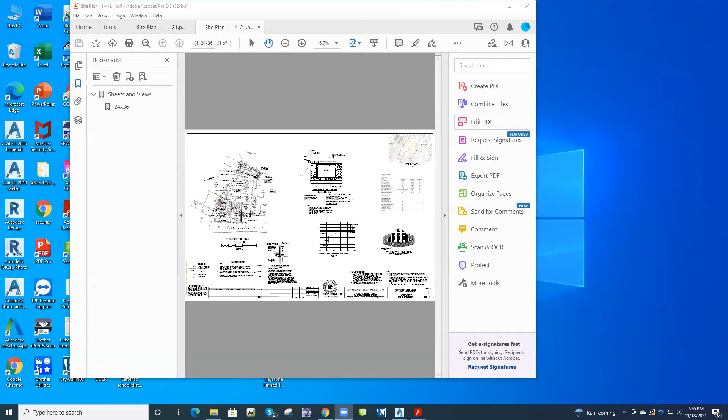So this is the site plan. The wall's back here. Now the wall I was referring to that was removed, it was along this rear property line.

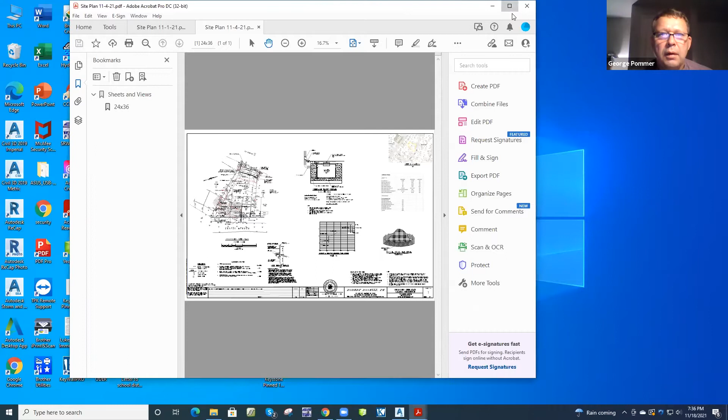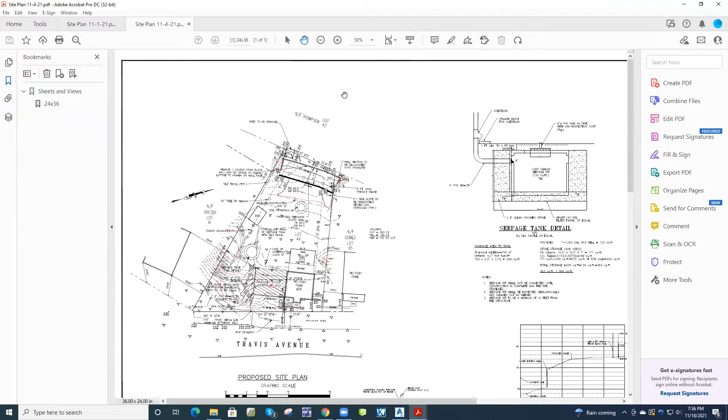That's no longer there. All right, before you go on, can you enlarge this a little bit so we can see this a little bit better? Is that good? Hit the plus sign at the top of the page. Yeah, that'll make it - to your left, next to the hand. Go up, center, go up. No, go up to the right. Keep going. To the right, next to the hand, you see the hand? Yeah, plus, there you go. And then you can move it around by putting the hand over it, exactly. You can zoom in more if you like. Sure.

Okay, much better. Thank you. Okay, this is the wall that was removed, this one back here. The shed will be removed, it's mostly on Mr. Calabro's property. That's still going to come down. This is the existing wall that's going to be lowered.

Okay, and this is the new wall. And then there's some grading along here to basically flatten out the yard back here. And then moving forward, here's the proposed garage, the driveway off the road. Some grading, so we'll use the side of the garage to serve as a retaining wall. It'll be doing double duty as a retaining wall as well. And there's some grading here. And that's about it, I mean, we got a seepage pit out here.

Proposed seepage pit. And that's about it, I mean, that's the crux of what we're proposing.

Okay, so the shed in the back, at the last meeting I guess there was an issue with who's going to issue the notice to remove the shed. Is that still an issue? And maybe Brian can answer that.

Brian Calabro? Yes, Brian Calabro, yeah. I believe maybe Peter Cook and his father, Brian, told the owners, my neighbors, that the shed needed to be removed. And they responded with, 'We're not moving it.' I think that's where they left off.

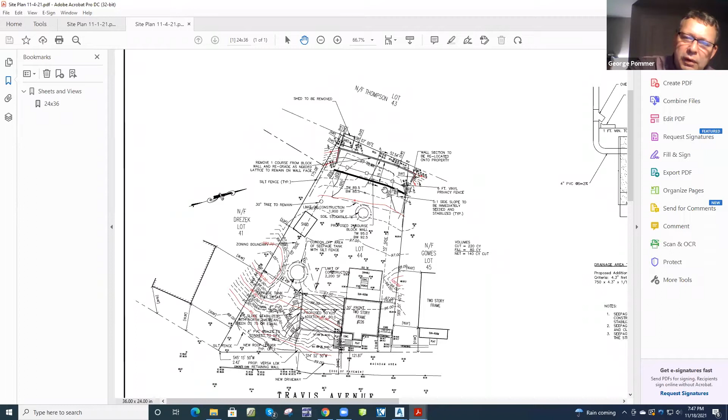Okay. And now the wall that's going further up, you're gonna relocate that? Are you gonna put plantings between the lower wall and the upper wall? Because on the cross section, I didn't see any plantings in there.

Well, yeah, there's intended to be, you know, probably either arborvitaes, or whatever I can safely grow there that'll last.

And Brian, correct me if I'm wrong, the code is 15 feet for two 4-foot tiered walls. That's correct, right? So it's 10? Is it 10 or is it 15? I think you might be right, I think it might be 10. So you went an extra 5 feet—is that what you did, Brian?

Yeah, well, I'll jump in. I just did it to be on the safe side, moved it back an extra few feet. Okay, all right.

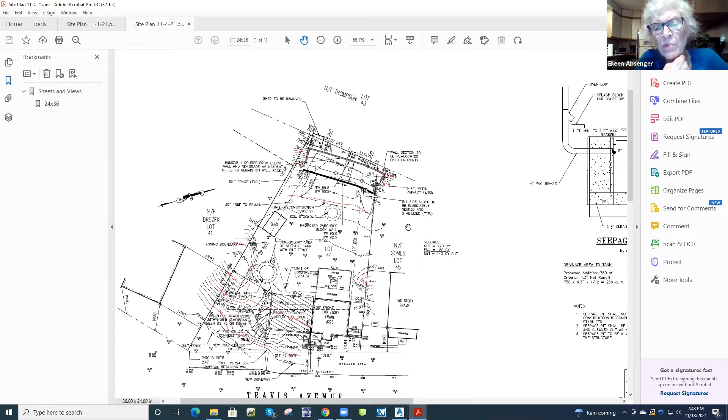Is there enough soil between the front wall and the back wall for the plantings of those trees, Brian? If this is bedrock, that's a lot of soil. Yeah, there's gonna be over 10 feet there—plenty of room to grow trees.

And I noticed you put the fence—what kind of fence is that going up on top? It says vinyl privacy fence. Do we have a cut of that too, or is that just a standard white plain vinyl fence? Standard white, there's no slats in between, just—

It's a panel, Brian. Sorry, section. It's a section panel, correct. Okay.

Well, that will hide—the reason I mentioned that is it'll hide the wall behind it, so effectively you only see one wall from the Thompson property.

More or less. Technically, visibly, you won't see any of the Mafia block at all. All of it's gonna be covered, one way or another, with lattice and ivy.

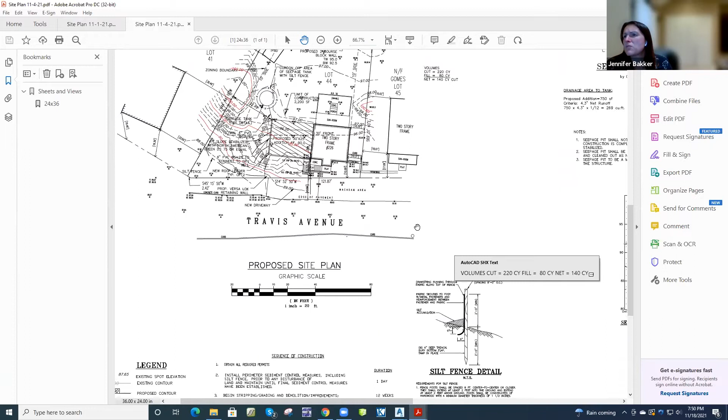Rob, can you scroll down? Scroll down a little bit. I think you have a section, right? Like this? Keep going, and go to the right. Don't you have a section of... there you go.

So that's those two walls in section. I think, Eileen, you were looking kind of for that detail, right? Yeah, I don't want to see Brian put trees in there and all of a sudden they're looking at dead trees and Brian's got to replace them, that's all.

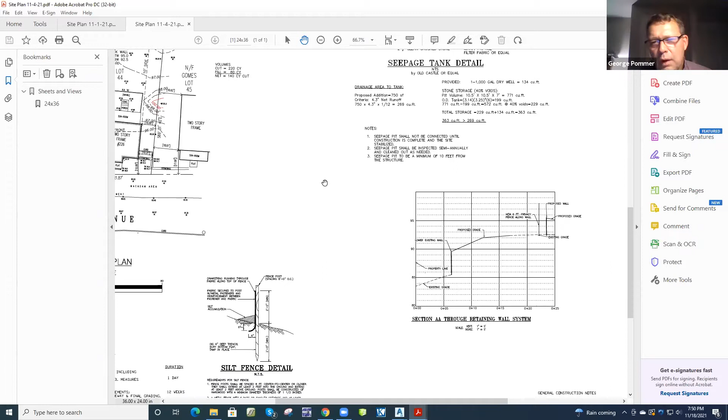So, Brian, the trees would be located right between the fence and the break in the slope? Is that the idea? Yeah, that would probably be best, I would think. I'm not an arborist, but yeah, put the trees on the flatter slope.

So the flatter section. So what is the slope between the top of the wall and where the break is? What is that grade? And the reason I mentioned that is we can't create steep slopes either.

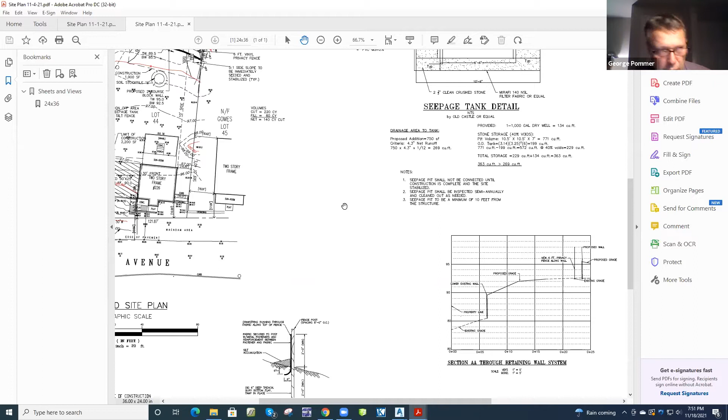It's got to be less than 15%, I think it's just around 15%. If I'm looking at the scale, it's about 2.5 feet over 15, so it's probably right on the edge. Being on the edge is okay, being over is not so good. It's 2 on 12, so it's probably right around 15% slope. Okay.

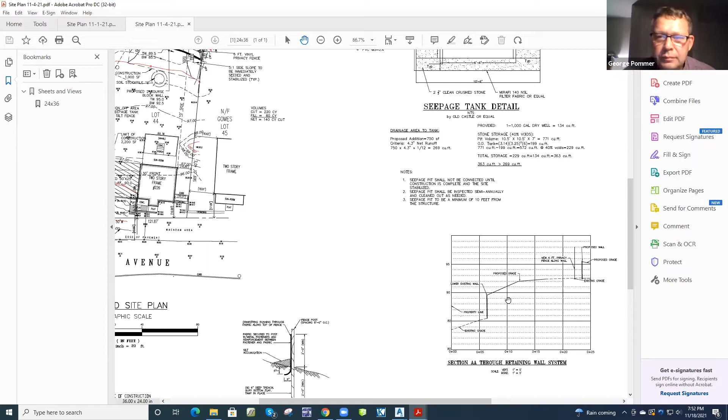All right, so that's the back of the yard. I don't have any further comments on the back. So with regard to the front, if you could blow it up a little bit.

It says on the bottom, right above the T in Travis, you go up, it says proposed Versa Lok retaining wall. Where's that retaining wall? Oh, you know what, that was in there. I should have taken that out, that's a mistake. That wall's not there anymore. I took that out.

Okay, and is that meant to be a driveway? In the addition, is there a garage under the driveway? Yeah, we were asking for architectural sections too, we didn't seem to see them. Yeah, I sent those in, a copy of the architectural plans in my submission. I'm 99% certain of that. I can check my records real quick.

Rob, if you can show that, because the planning board is the ARB as well, please show that to the planning board, make sure they're okay with that. The garage is planning on being street level, just above street level, 2-car garage with a bonus room above it. You have an 89 in the street and a 90 for the addition, so about a foot pitch out, thereabouts.

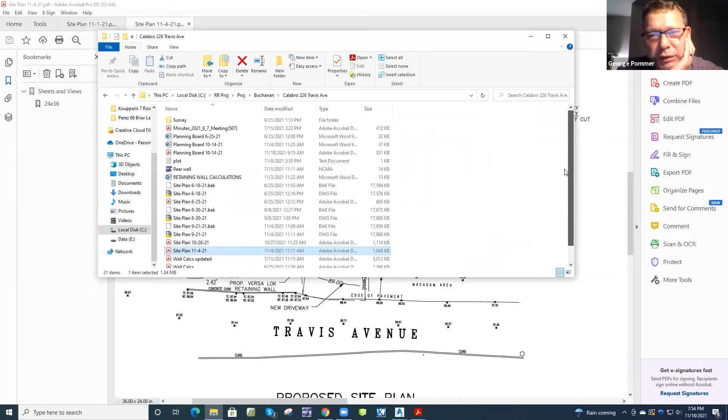But the problem is if you park a car in front of the garage, it's overhanging into the right of way, if I'm not mistaken. What's the distance between the front of the building and the property line? I think that's like 12 feet. Yeah, that's not the length of a car. Right.

Technically, so right now all the cars that are from my house and the neighbor next to me, we're all parking in front of the house down that road. So technically every car on that road from my house, my neighbor's house is parking in the right of way. But you're talking about the right of way being 15 feet.

Yeah, the reason I mention that is the curb, if we put a curb down this street, it's gonna cut your driveway down. That's the problem. If you were to move the curb, it would be fine, but there's a curb there already. The curb looks like it stops right where the hand is, and then it's just edge of pavement. So if we were to continue the curb down the street, we'd be cutting off part of your driveway.

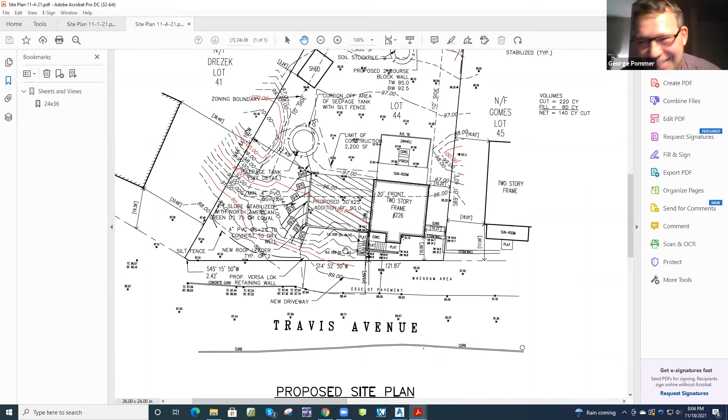And I think that's probably because Brian switched engineers. You went from, I forget the other guy's name. Right. Yes, we switched. But you should do that here as well.

And if you're 30 and above, that's somewhat of the problem we had in the back. Is that for, are you referring to disturbing it, or are you referring to having it when it's all completed? I'm sorry, can you repeat that? Disturbing a steep slope, or are you referring to when it's completed, what's there once the addition was finished? So both.

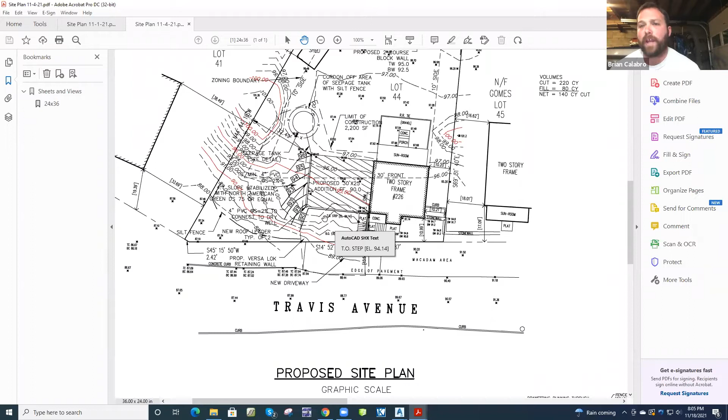So what you disturb in those ranges is one consideration. And then when you put something back, you can't create steep slopes. Correct. So I guess really, once I'm done digging the foundation and the building is completed, either there is no slope, or if there is a steep slope, we need to have put a retaining wall in.

So that's one solution. Let's just go from the 15 to the 30, because that's the range you can work in. And if you started out with, let's say, a 15 and you ended up with a 15, that would be okay. If you started with a 15 and ended up with a 25, you didn't really create a steep slope, but you made a steep slope steeper, in which case you look at it and make sure it's not going to be compromised.

That kind of condition. So if you need a wall to make it not compromised, or a road or whatever, then that's what you got to do. But if the side of the building and behind it can be graded properly to not have a steep slope, that's fine.

So let's talk about the side of the building here. Let's say it was previously 20% steep, and you graded around it and it was 21%. That's pretty much the same thing. You didn't make anything better, you didn't make anything worse. Okay.

So if that gives you any kind of guidance, it's kind of a tricky thing in the code. The intent is to not create an erosion problem. You don't want to make things more steep, but sometimes over 30% would be a problem. Right.

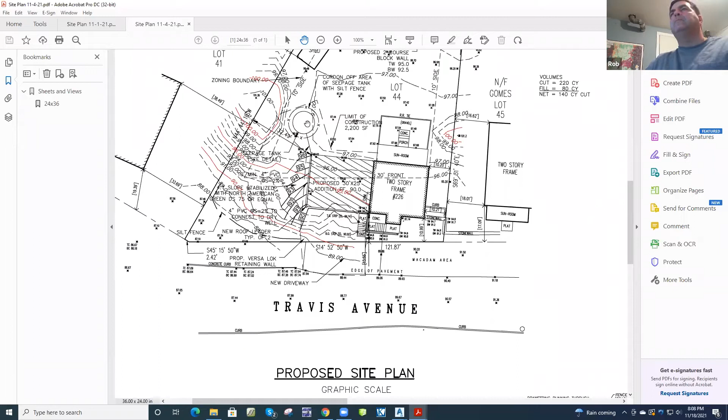And then the drainage from the new addition goes back to the dry well. How deep is that dry well? 6 feet is the dry well itself. It's a 1,000 gallon pit, so it's 6 feet high plus a foot of backfill, and then a foot of stone underneath. The whole excavation probably ends up being about 7 to 8 feet.

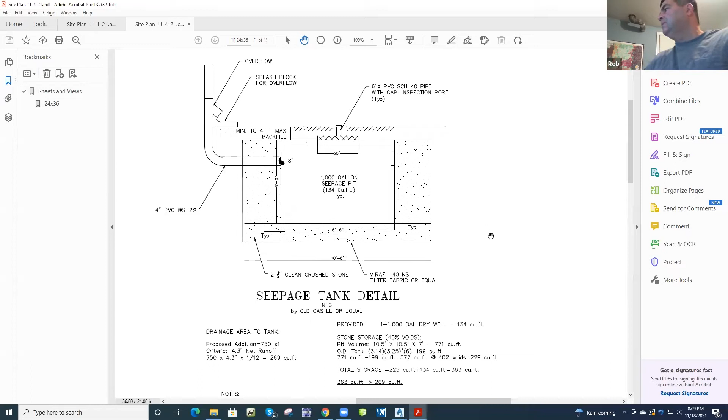Well, what happens if there's rock in that location? Well, I guess we'll have to switch to Cultec or something a little flatter. We'll just have to make more of them, I guess. We can do a test pit out there to determine that.

So 6 or 8 feet, you're still a little bit above the elevation of the base of the finished floor of the garage. So garage is at 90, you're at 97, so you're right at the finished floor of the garage, right at the bottom of it.

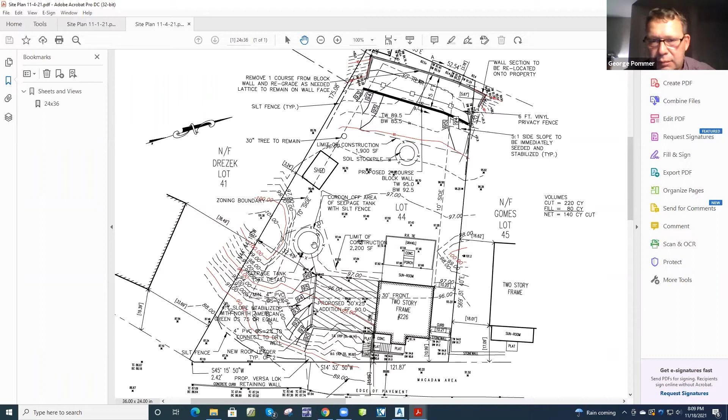And are you 10 feet away from the garage? Yes. So 10 feet minimum, anything you put in there has to be 10 feet from the property line and 10 feet from the structure. So you got it in the right spot. It's just what's there, we don't know.

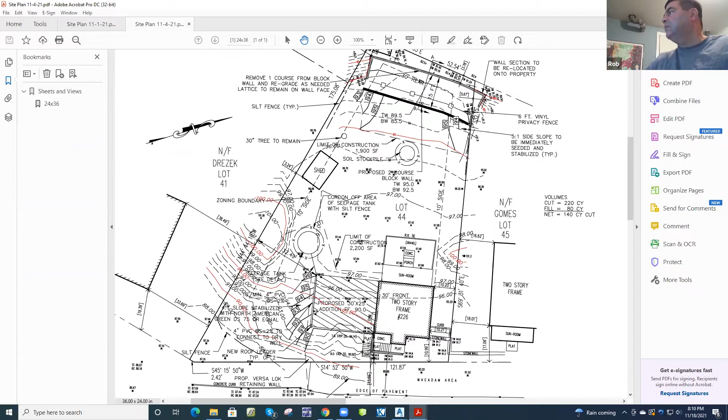Unless Brian's dug a hole out there. Not yet, I just want- Not yet. All right, those are the only questions that we have, Mr. Chairman.

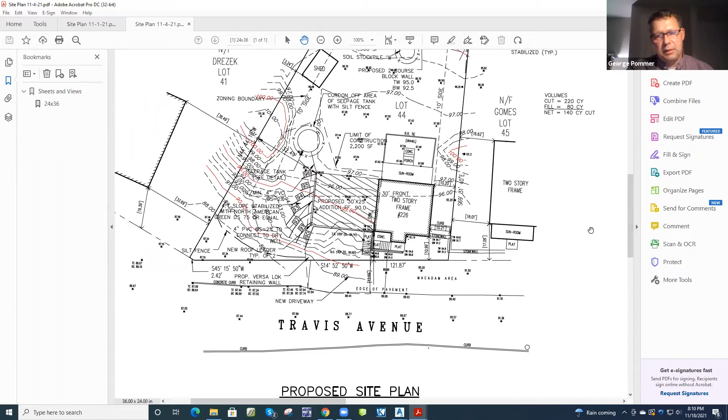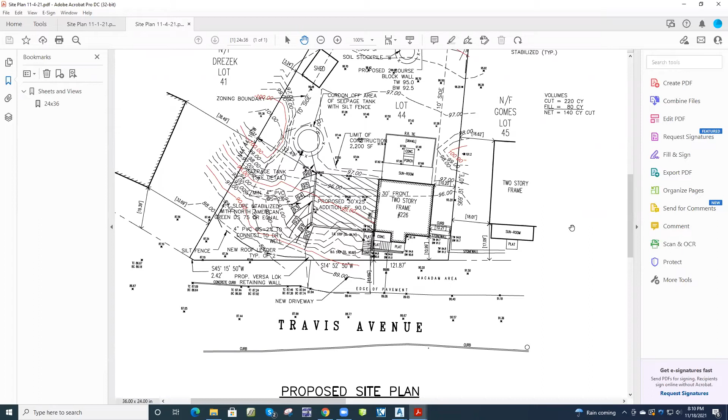Seems like we need them to come back and fill in some of the blanks with what's going on in the front here with the driveway. Will you be able to write up a summary and give it to Rob so he makes sure it's on the plans and get it back? Absolutely. And Rob, take a look at the code, I think it might help you streamline it too. And stop sharing your screen so we can go back to the regular screen, Rob.

We also need an architectural picture. I went back, I did send in one set of architectural plans to the planning board. I sent in 10 copies of the site plan, that was in the package I submitted, but just one copy of the architectural. I can send in PDFs if you want. When did you do that, Rob? With this submission, November 3rd, 2021, I FedExed it November 4th, so it made it.

I got a hard copy from the office and it's not included. Oh, so I don't know what happened to them. Yeah, well, no, I just sent in one copy, I didn't send in 10, with the site plan. Okay, maybe they put it somewhere. Was it one sheet, Rob, or was it multiple sheets? It was multiple sheets.

Was it done by an architect? Yeah. Rob, can you just email it to the office tomorrow? We can forward it to everybody, please. That'd be great. What I'll do is bring them to the print shop and get them scanned, and I'll email them in.

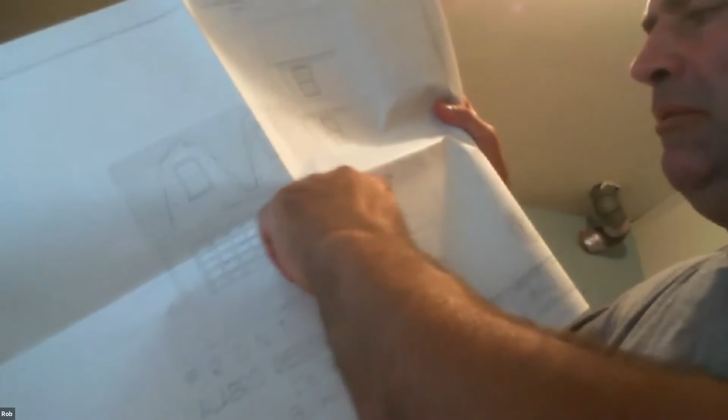Okay, but they're 18 by 24. I don't know if you can see it, but that's... well, probably wasting my time, but this is it right here. I'll get it scanned and email it to the secretary.

Rob, is that the same plan that Brian submitted in '17? The drawing? I have one copy here that was in the office when I started, from October 17th. Is that the design, Brian or Rob? I don't know. I'm not sure.

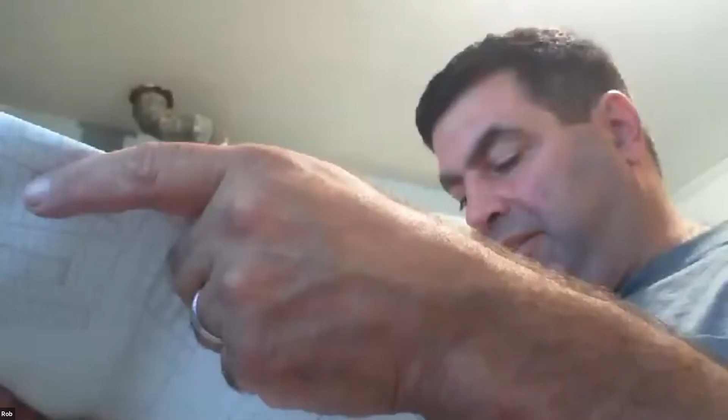If it changed since 2017, are you saying? Yeah, I've got that, does that look like it? The date on here is October 1st, 2017. So I have one in the office that Brian dropped off with the previous inspector, if that's the current one you're looking at. Yeah, it probably is because I don't see a revision date on here, so it probably is the same. Okay, just checking. All right.

Peter, do you have any other questions as far as the village building inspector? Two items I was concerned with more so.

I know that shed, the neighbor's, the Thompson shed, it just says to be removed, and we know it's not really going to move well. Is that something he is going to just move with Brian and push it back on their property with the machine? Are we going to have a problem with that? The Thompsons addressed it, obviously.

My second question is, there were no violations written on this. Brian stopped working on the wall. There was a problem. Winter is coming and he's going to have his excavator on site to work on the wall. Being that there are no violations, can I not possibly start him on a permit to excavate after the wall is addressed, while the machine is on site? Or does everything have to be completed? It wasn't an open violation scenario.

That's my question. I didn't know how to move him forward. He can't obviously work on that wall because everything's in the way, but he's only going to have the machine for a certain amount of time. I'm wondering, is there an issue with issuing a permit to get the foundation excavated while he's doing the wall, or after he moves the block? Just trying to understand what to do.